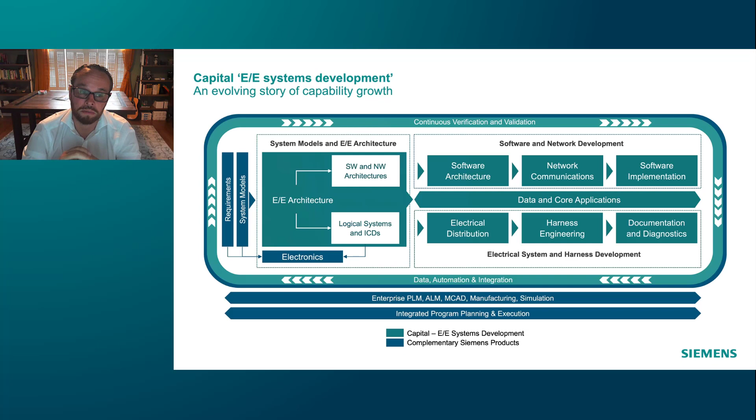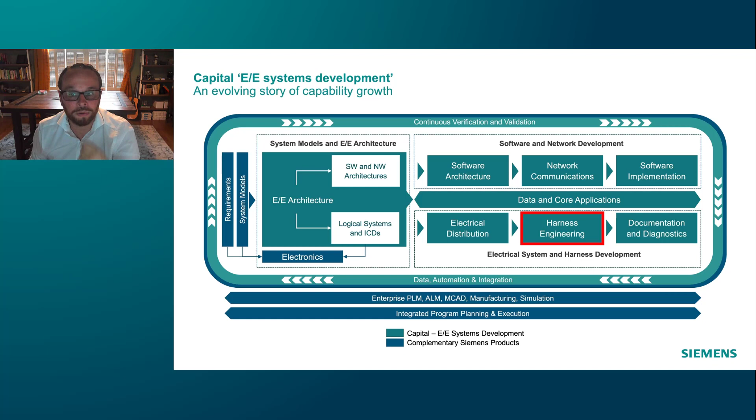All of this is wrapped in a continuous verification and validation process and is integrated with the product lifecycle management systems, the MCAD data that form the physical constraints for the electrical distribution systems, with a range of other complementary Siemens products. But today we'll be focusing on harness engineering and specifically the manufacturing, how those harnesses are actually produced so they can be installed on the vehicle.

Across all of the core markets for harness manufacturers, the needs are really the same, whether it's agricultural, automotive, aerospace, commercial or defense. There is constant pressure to reduce cost and schedule. The complexity of the content is going up year on year, and the variation within a single product line increases relentlessly. This is being driven by the increasing electrification of products, driving more and more of the distinguishing features of a vehicle into the EE domain.

And then, of course, finally, we live in an increasingly globalized economy where we can look for options for optimized manufacturing processes based on an entire globe of opportunity for different labor markets and those kinds of things.

And so Siemens and Capital set out to deliver a comprehensive digital twin connected by a consistent digital thread across all of the different elements of that comprehensive twin. So for the product, that's where we tend to be more comfortable or familiar with a digital twin as we build the model of the product.

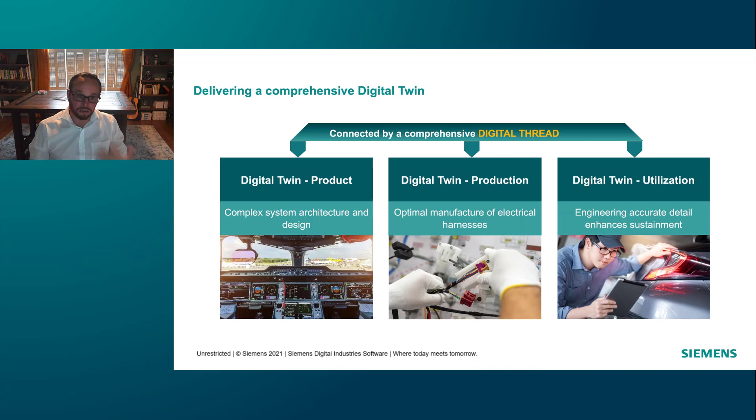But we also wish to build the model of how that product is made, and that enables us to optimize and streamline the manufacture of electrical harnesses. And then finally, the products don't cease to exist as they go out into the world. That twin needs to extend to cover how those products are used, as well as a feedback loop that carries data back into the previous two stages in a spirit of continual improvement.

So none of these pain points are going to go away. None of the trends are taking us away from these challenges, and everything highlighted there is what we need to deliver. And that's very much our mission, to support our customers as they try and overcome these challenges.

And we can do that by automatically generating that bill of process using assets such as part libraries, rules and constraints, and other IP within an organization that lets us build both the digital twin that's encompassing the product, the engineered product models, as well as the validated models of process in addition.

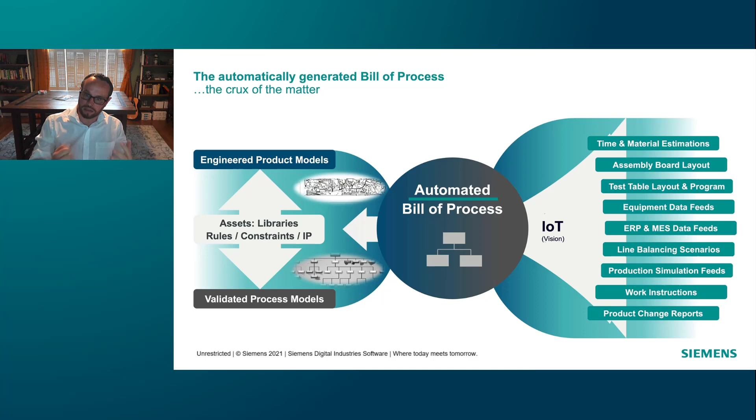And out of this, by using that model of the physical product as well as the model of the process, we can automatically generate a bill of process and all of these different outputs which are needed to then drive the actual production process. And of course, our vision is, as we go into the actual production process, that we can carry that back in that process of continual improvement.

And by carrying this back, as even the intellectual property and methodologies we use to manufacture and describe our products are captured digitally, this enables us to have configurable styling and visualization, capabilities like automatic part selection, customizable rules and checks, and the ability to validate and manage change transparently.

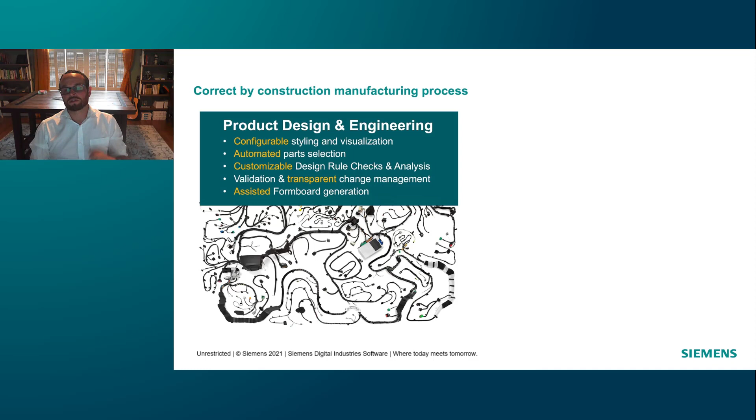And we can carry all of that expertise into the manufacturing process as well, with reusable process modeling, and then the ability to generate, not this time the product, but the structured bill of process and bill of materials that is required in order to manufacture that harness, with all of the attendant costs and estimations required to ensure that this very tight margin business is able to be profitable and bring value both to the harness manufacturers' customers and themselves, and achieve through this continual improvements in efficiency with items like automatic work instruction generation.

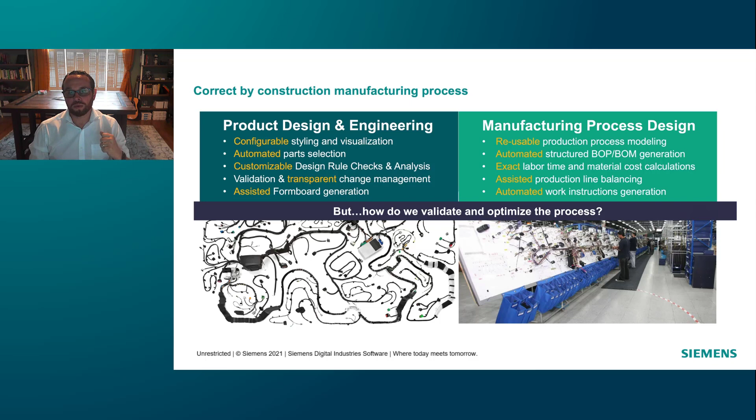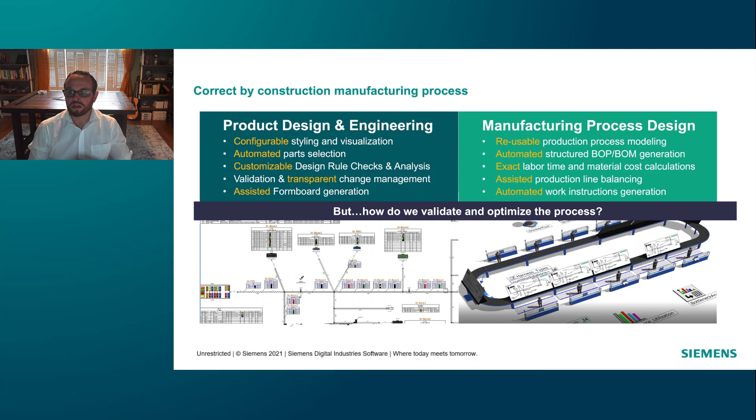So if we can do this, how do we validate and optimize this process? It takes a really long time to set up a factory. So how can we do this? And of course the answer is we do this with the digital twin that we've built of both the product and the process in a feedback loop. So I'd like to give you a little bit of an overview about how we're able to achieve this.

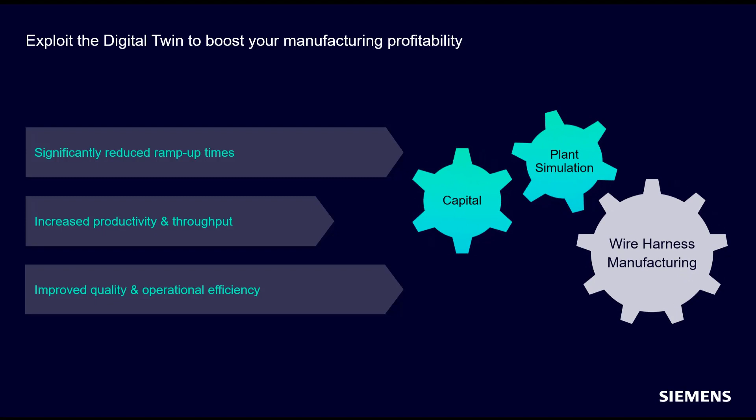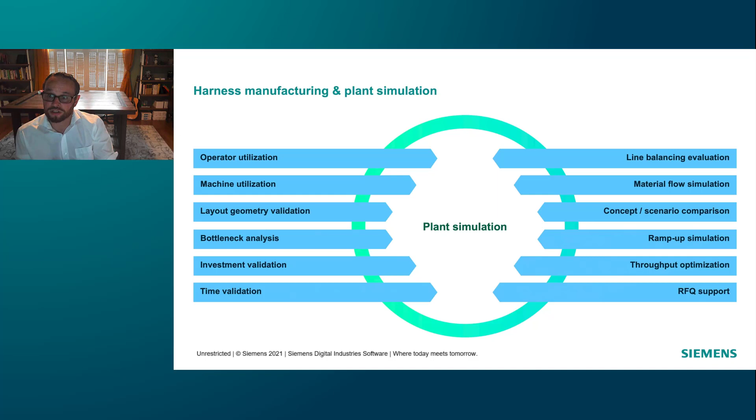So what you've seen there is it's possible to take our digital twin and bring it to life, simulating the actual factory and the operations going on, enabling us to perform all kinds of validations, analyses, and checks.

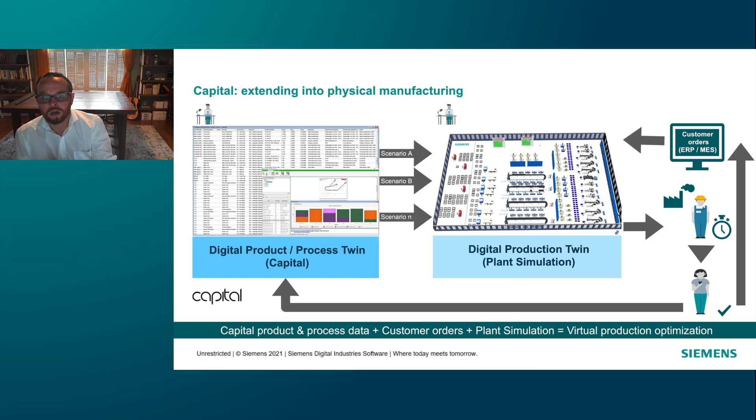We are also able to take that digital product or digital process and validate and explore different alternatives so we can better understand and find new ways of manufacturing and maximizing the resources that we have, and essentially then enable us to optimize production in a virtual environment before we've even begun to rearrange the shop floor for a specific harness.

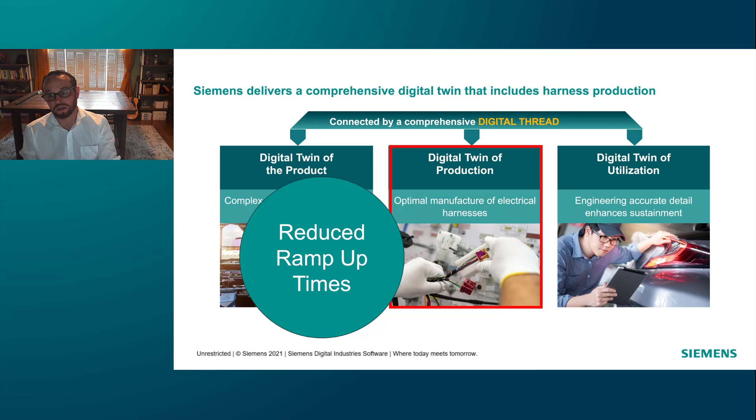What we've seen today is that by including production as part of a comprehensive digital twin, we're able to reduce ramp-up times for new production lines, improve quality and efficiency, as well as overall productivity and throughput, removing bottlenecks. And so thank you very much for your attention, and please let me know if there are any questions.